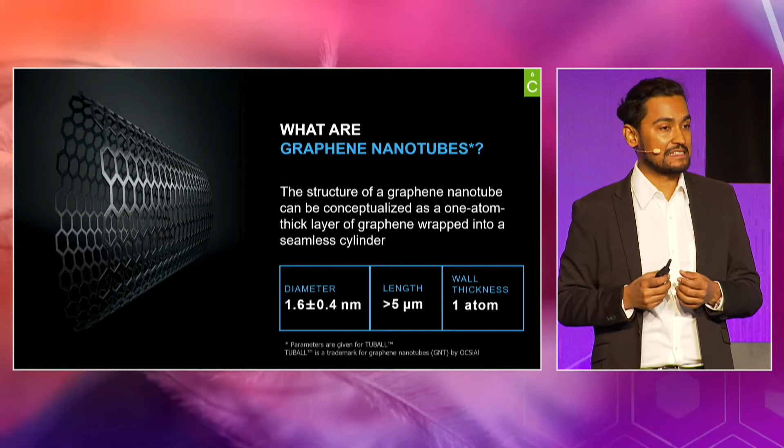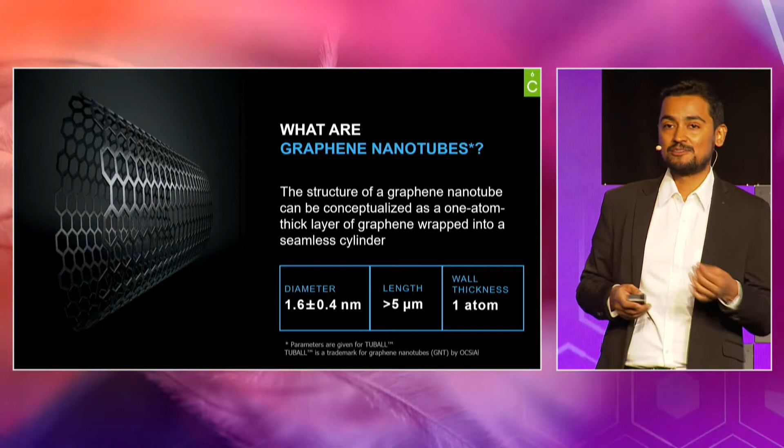This special structure of carbon to carbon bonding results in some exceptional properties for these carbon nanotubes. For example, in tensile direction, they are 100 times stronger than steel. They are almost as conductive as copper, but 20 times lighter than copper. The aspect ratio is 5,000 to 7,000, and sometimes it can go to 10,000 also. So if you take all these properties, you get an additive which you can put in a very, very small quantity, almost in parts per million sometimes, and get these properties inside the polymer matrix.

Primarily, graphene nanotubes are used to provide electrical conductivity and improve the mechanical performance of any polymer they go in. Another interesting fact about graphene nanotubes, they are pretty stable chemically, so you can use them in a lot of polymers. Almost 75% of the polymers known to man can benefit from graphene nanotubes. You just mix them in.

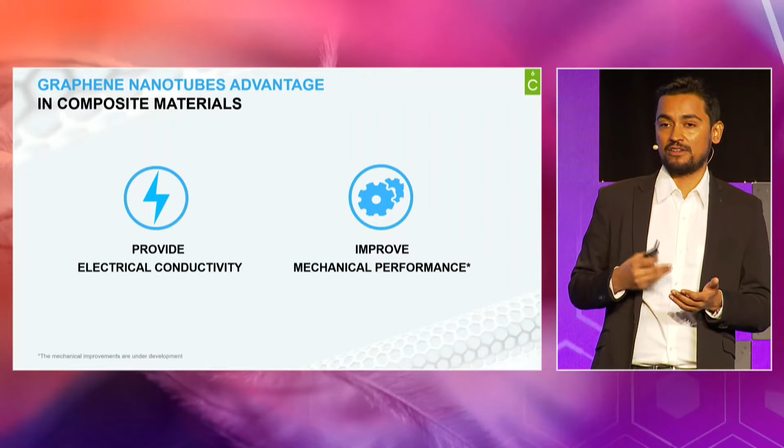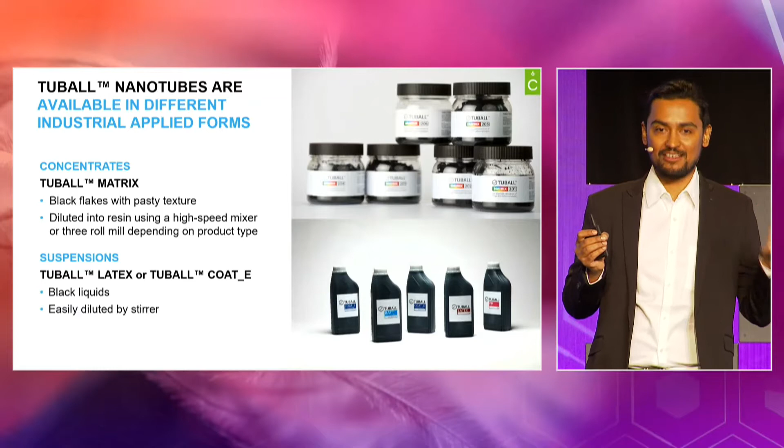Now, being of a nanoscale, they are notoriously difficult to mix in the powder form, as some of you must have observed yourself also. So most of OCSiAl's effort in product development goes towards making these graphene nanotubes easy to mix with the standard production equipment. We do not provide, unless it is specially requested, pristine nanotubes. What we provide is graphene nanotube concentrates, either suspended in water or any other solvent, which is the dispersion, or in the form of a flaky paste, which is graphene nanotubes suspended into a neutral carrier for your use. I'll dwell more into that.

The prime value proposition which graphene nanotubes bring in polymers, composites or pristine polymers is it increases the product value by making your product last more. It increases the business value so that with the same composite or material that you are producing, you can now use it in more segments. If you are making something for marine environment, you can also use the same in oil and gas environment because the properties are enhanced to that extent.

And one of the most important things is environmental impact. Sustainability is at the core of OCSiAl's innovation. So we believe in doing better with less, one of our key mantras. Nanotubes, as I just mentioned, are used in ultra low dosages. That means you use very less material. They increase the mechanical performance. That means whatever you have produced can last more, can have more service life, thereby impacting the environment less.

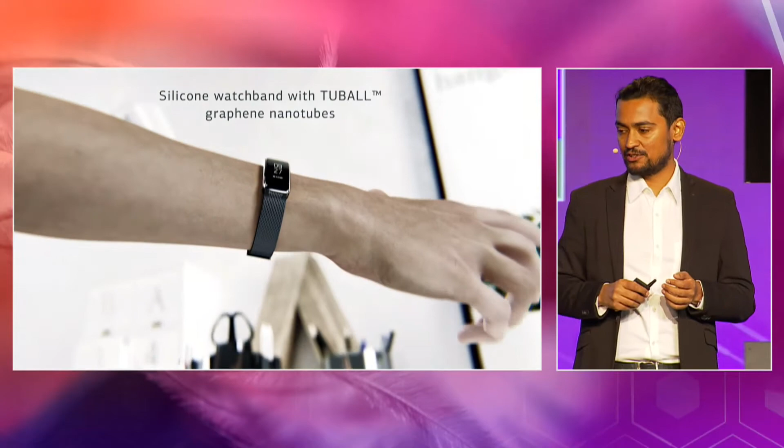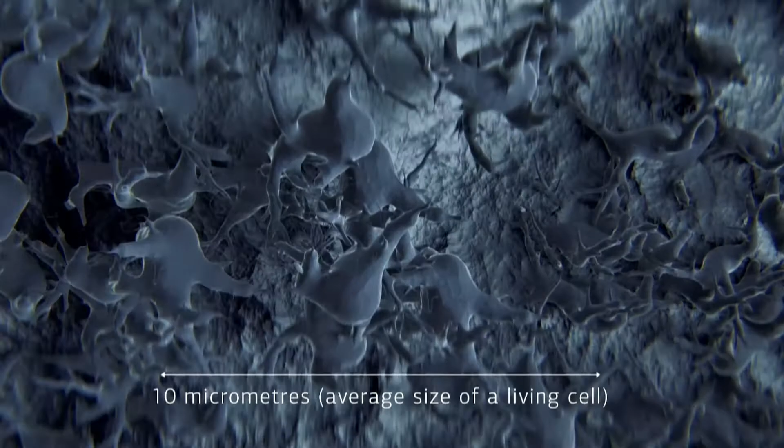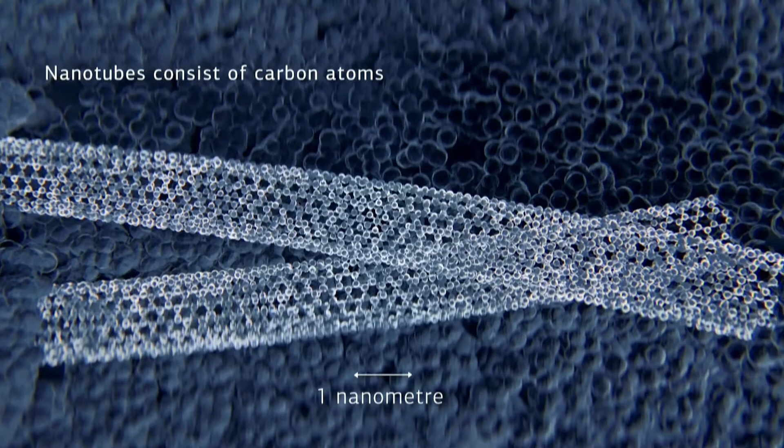Coming to the specific point of electrical conductivity, it is one of the most sought after and in commercial use of graphene nanotubes. Well dispersed TUBALL inside a polymer creates its own 3D conductive network which can give electrical conductivity because now the electrons can transfer through the whole polymer matrix. Just a fancy video to show the same. So this was just a fancy way to show how graphene nanotubes behave inside any polymer matrix.

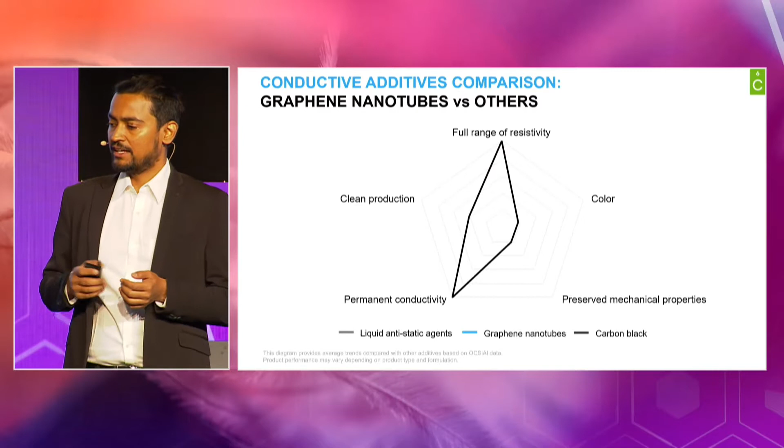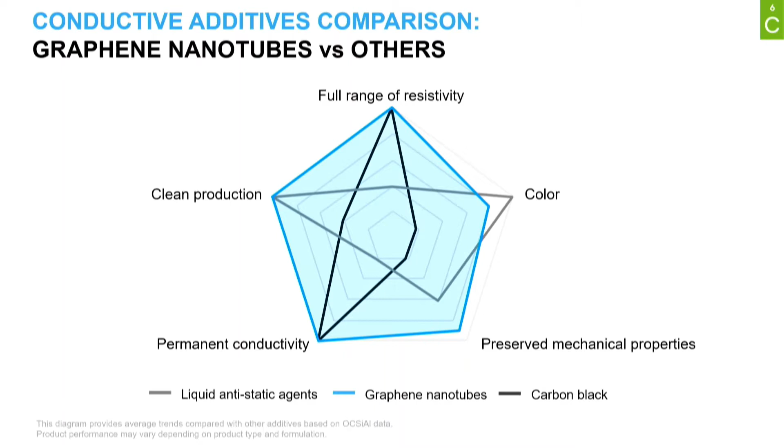In comparison to some of the other additives which bring electrical conductivity like conductive carbon or liquid anti-static agents, graphene nanotubes bring a whole gamut of benefits. For example, you can get a full range of resistivity, you can get clean production facility, you get permanent conductivity, and you can have an option of a lot of colors.

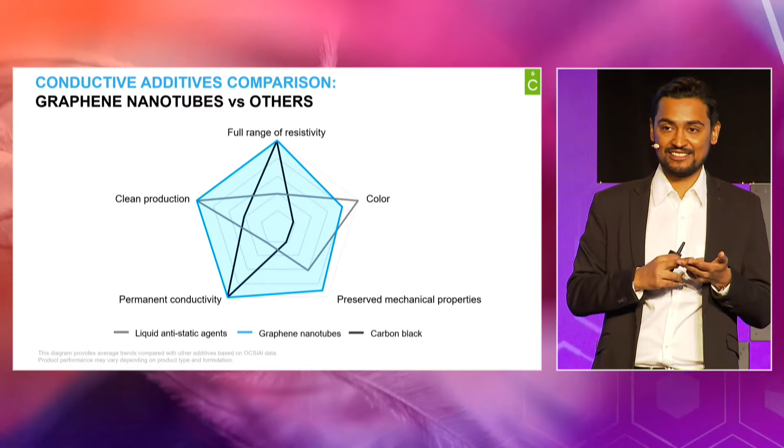I'm just curious by the show of hands if anyone is a fan of processing conductive carbon here. So anybody who loves processing conductive carbon in their facility either is working for conductive carbon or hates their facility. That's what we believe, because it makes everything black and it's really, really dirty.

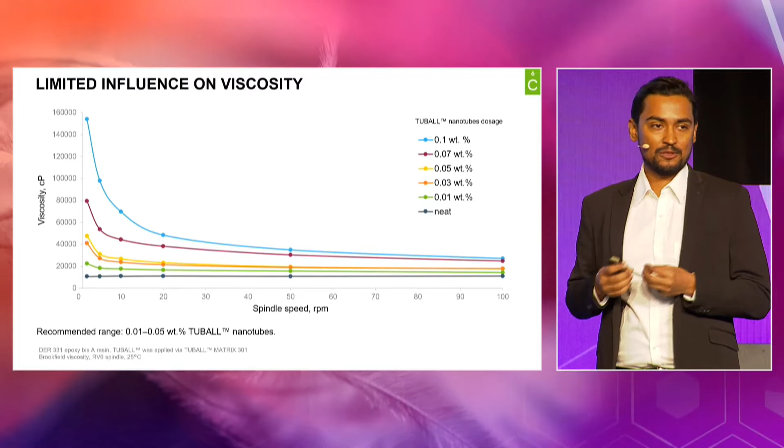Also, there is a very limited influence on viscosity of the polymer by using graphene nanotubes in the required dosage. Well, they have a very high aspect ratio, so they do bring some thixotropy. But if you use nanotubes in the desired range, the viscosity influence is almost minimal, as you can see in this graph.

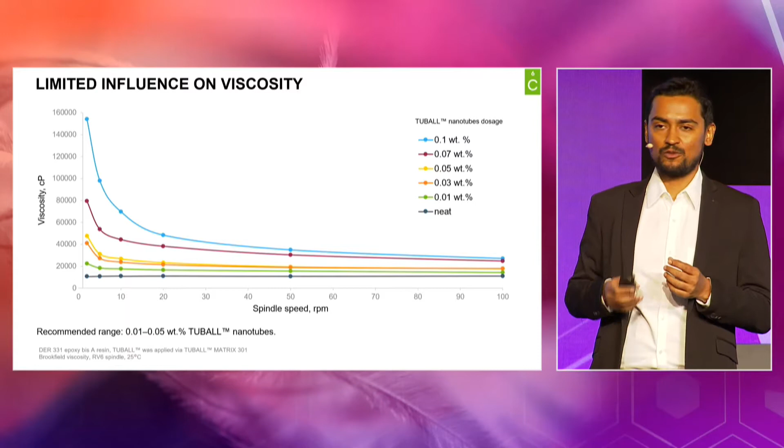You can have conductivity, permanent, and color also with graphene nanotubes. That is something very, very unique. Most of you who have used anti-static or conductive material right now, for example, anti-static gratings or anti-static gel coats or anti-static SMCs, would be used to getting black color. But with nanotubes, it is possible to have conductivity as well as some colors also.

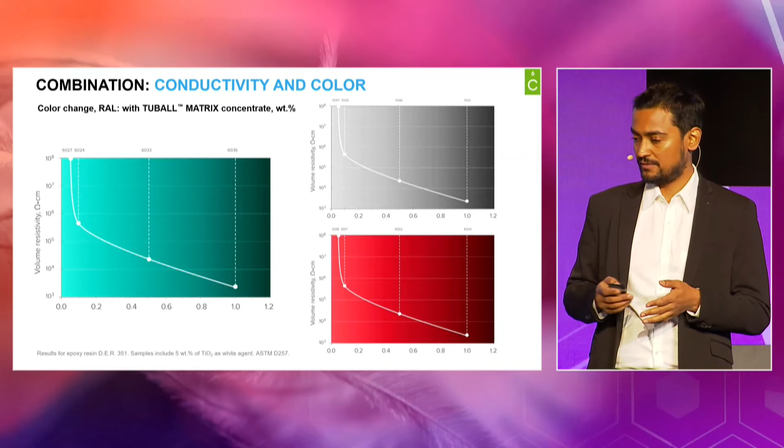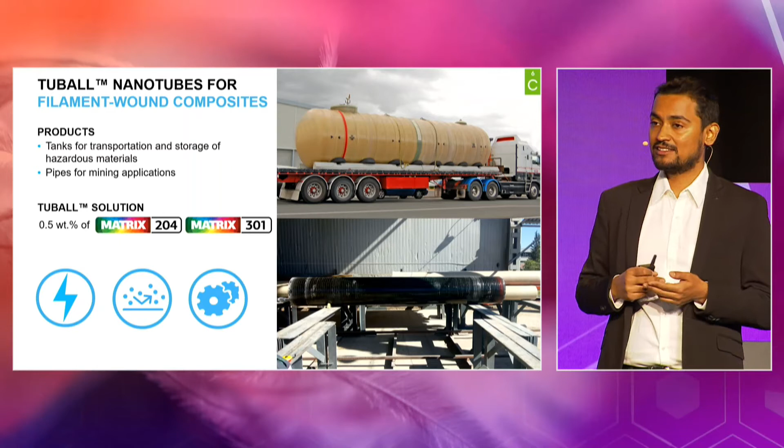You can get conductivity. You can get colors, that means colored pipes and colored tanks. At the same time, you can get the whole range of resistivity with mechanical performance, either enhanced or retained.

Same with pultruded composite. One special point about pultruded composite is it is by value extremely, let us say, cheap. So adding nanotubes to pultruded composite doesn't increase the price of pultruded composite to an extent that it becomes impossible to buy. This is one of the great myths that we have been busting, that nanotube addition makes the product or the polymer very expensive.

It doesn't show. So you can see this polymer, for example, in the cable trays or in the gratings, you add extremely low amount of nanotubes, sometimes 0.02% of nanotubes, and get whole range of conductivities. These pultruded parts can now be used in ATEX environment, that is the environment which has explosive in the atmosphere, and these can be used in other parts as well.

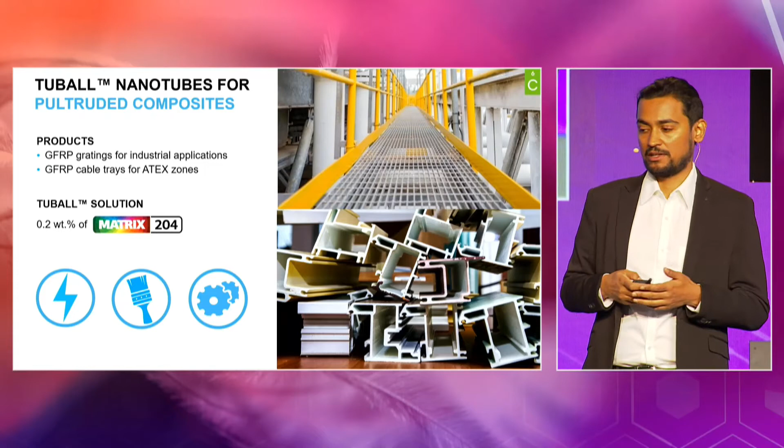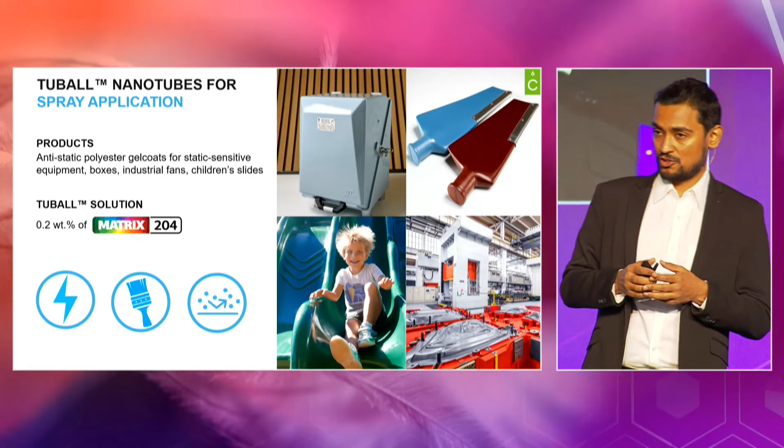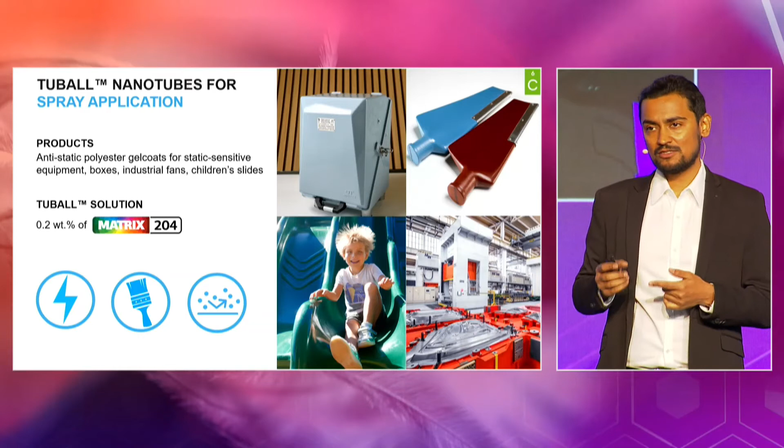For spray application like gel coats, carbon nanotubes bring a very unique benefit, particularly in the case of tooling gel coat, where addition of TUBALL to tooling gel coats can have a very positive impact on the productivity of your molds. It's very easy to open molds without any static charge. Also, it is safe. And frankly, no one is a fan of getting shocks by static charges. Similar is the case with any other coating application and also the gel coating application. If you see the kid there with the hair straight, it's static charge.

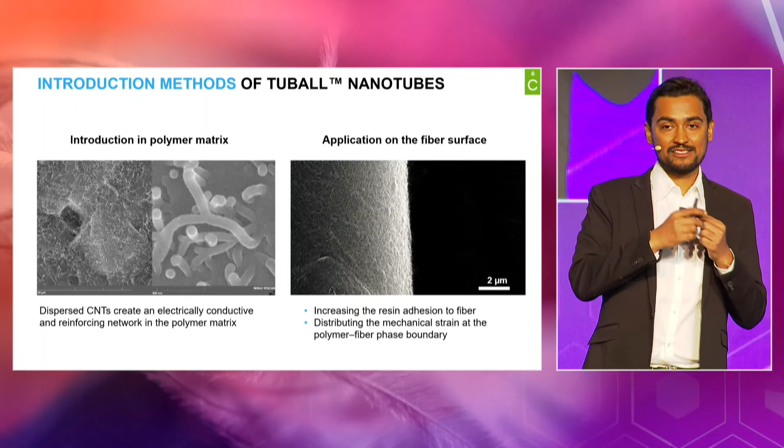Now, touching on the topic of mechanical reinforcement, nanotubes can be introduced in the polymer matrix by two methods. One, by inculcating nanotubes directly into the resin polymer, making the polymer inherently conductive, or putting the nanotubes somehow on the surface of the fiber, thereby increasing fiber resin interface. With both the methods of inculcation of nanotubes, we believe these two mechanisms happen, and because of that, the strength of the polymer is increased.

One, in the nanocomposite, cracks now have a longer path to tread. So micro crack propagation decreases significantly because the nanotube has now reinforced the polymer matrix. Second, there needs to be a fiber or nanotube pull out with every crack. So more energy of the crack is dissipated in doing this. These are two hypotheses we have for how nanotubes reinforce the polymer composites.

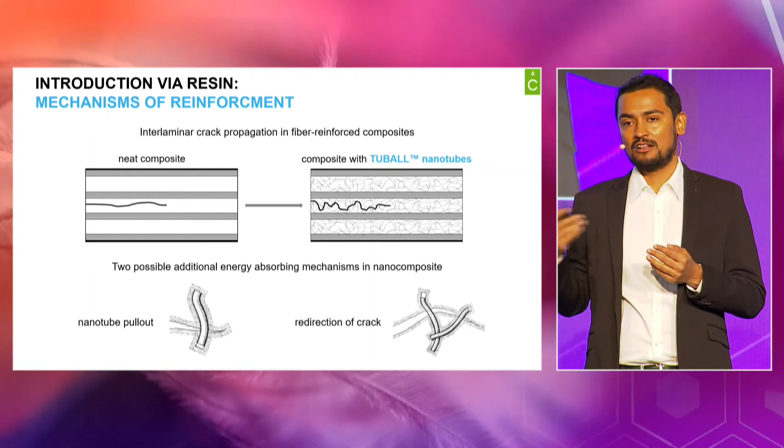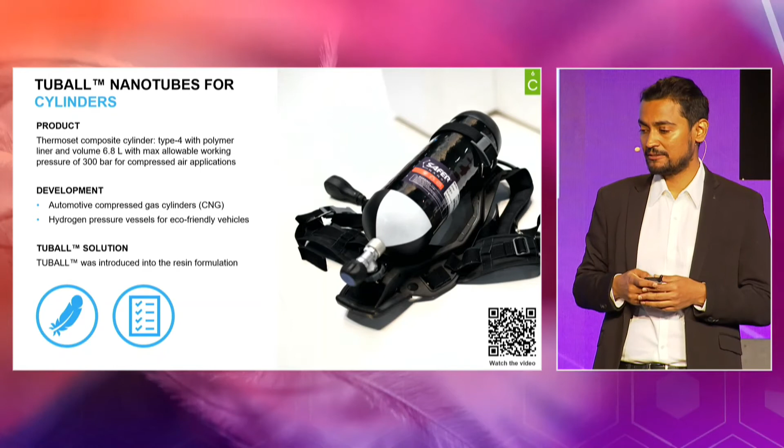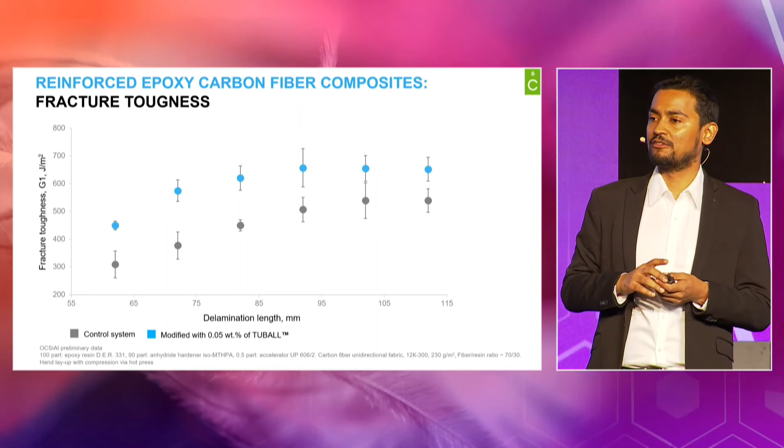Now, one of the interesting and immediate benefits of using nanotubes inside a polymer matrix is increase in fracture toughness. If the application is such that it needs high fracture toughness, this graph shows that nanotubes can really enhance it at very, very low addition. So that is an excellent value proposition, especially for something which gets a lot of impact, like the bicycle frame case I just shared with you.

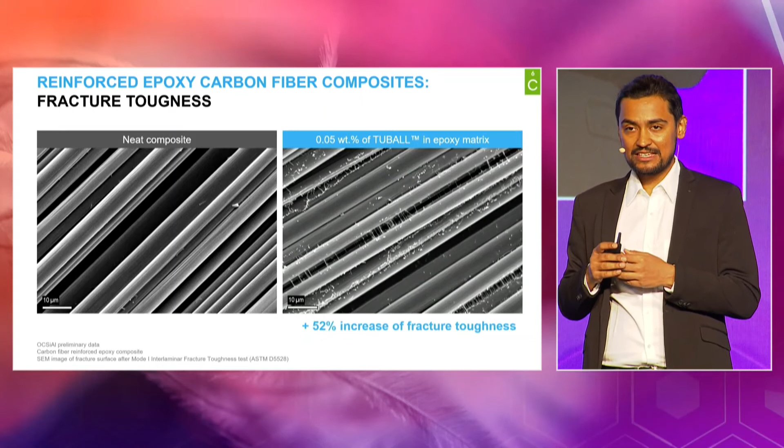This is the same image of a neat composite and composite with TUBALL inside it. As you can see, nanotubes have formed their own reinforcing bridges between the fibers and between the fiber and the resin, thereby reinforcing the resin.

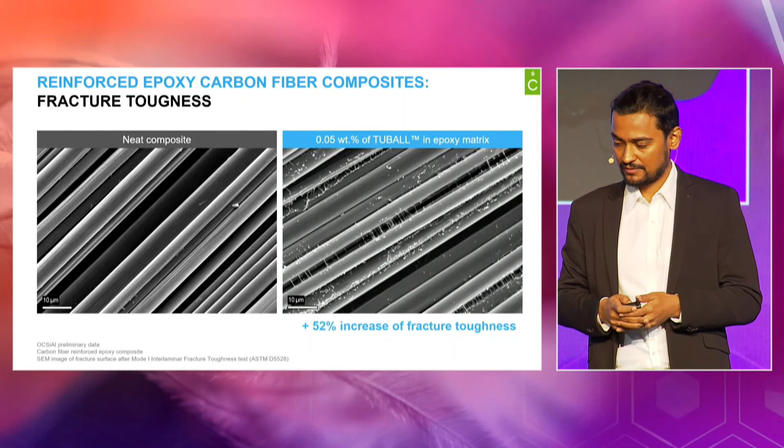Now a little bit about the company OCSiAl. We were incorporated in Luxembourg in 2010. Right now, we have more than 1,500 clients and partners. We are a commercial company, we don't do much of the lab work outside. We produce 97% of global graphene nanotube production. That means we work a lot on the IPs, so we have more than 80 patents in this application. We love to collaborate with fellow technicians, fellow industrial labs. So please feel free to contact us for any collaboration.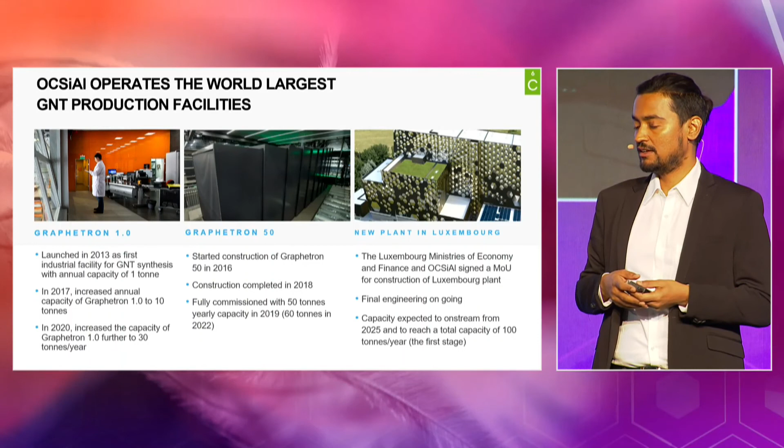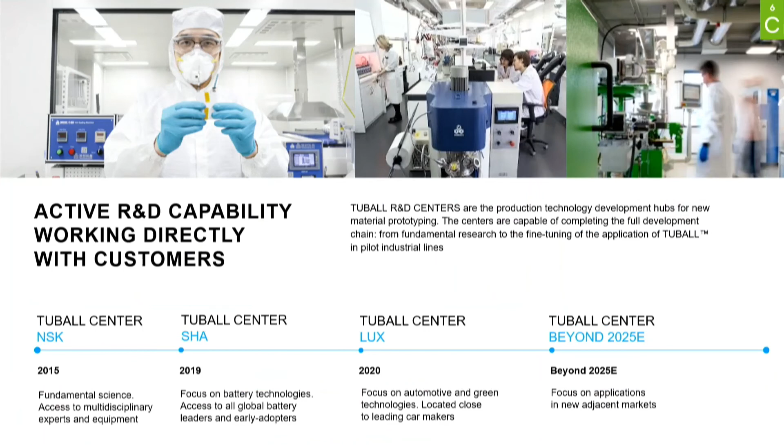We have 3 reactors, Graphetron 1, Graphetron 50, and a new plant which is proposed in Luxembourg. We have 3 R&D facilities or product development facilities right now, one of them in Shanghai, another one in Luxembourg. And in brief, we have a global footprint, once again headquartered in Luxembourg, where most of our key technical team sits.

Something really, really important about health, safety, and environment. OCSiAl is a very conscious company when it comes to health, safety, and environment. We are the first REACH certified nanotube company in Europe. We have also the EPA consent.

If you have any questions for me right now, I'll take them. It's time to wake up. I'll just stand here till you come up with a few questions, and it's okay. I'm free. Yeah.